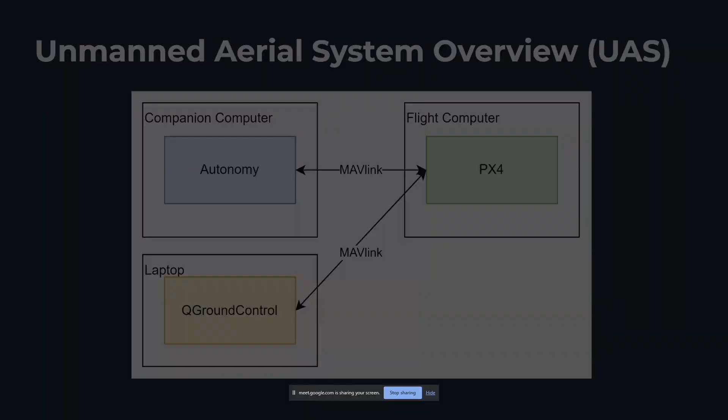This is what a typical drone that I've made at TAR in the past kind of looked like. So we had the Jetson TX2 as our companion computer, which talked directly to the Pixhawk 2. And then the Pixhawk 2 had some external sensors, which was like a 1D LiDAR for altitude estimation, or a GPS if we were flying outside.

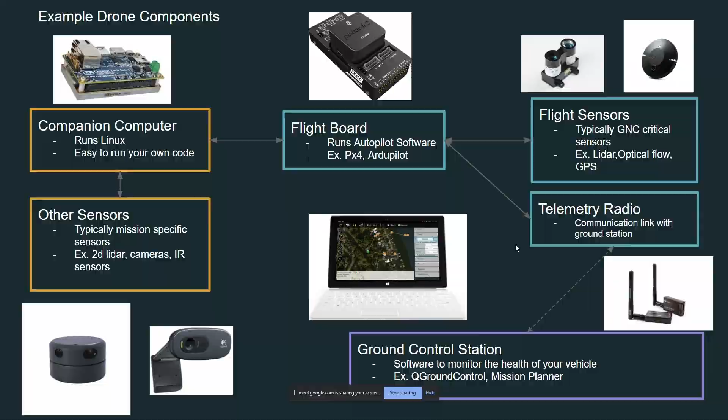So now I'm going to go a little bit more in depth into how the software on each of these computers is structured. So the Autopilot, as I alluded to before, runs the control loops. It also has a communication interface. It has a logging module, and then it also has drivers for all your sensors and actuators, as well as anything that directly comes with the flight control board.

And then another thing that's pretty special about the Autopilot is that it runs a real-time operating system, which basically ensures that all of the software tasks are scheduled frame by frame, and the operating system ensures that every task runs in a given amount of time and has the proper amount of allocation to run per frame.

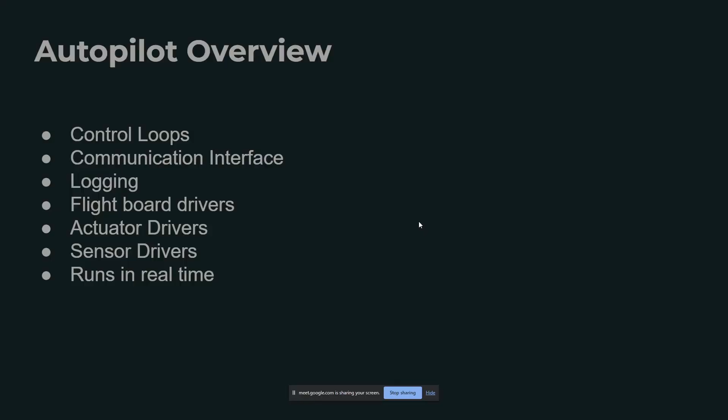consume the data. So for instance, your sensors will then go to what is called an extended Kalman filter, which basically takes all of the sensor data and tries to filter it and make a more accurate estimate of the state of the aircraft. And once the state of the aircraft is formulated, that data gets passed over to the control loops, and the control loops basically take the desired state of the aircraft and calculate what kind of inputs need to be given to the actuators to reach the desired state based off of the

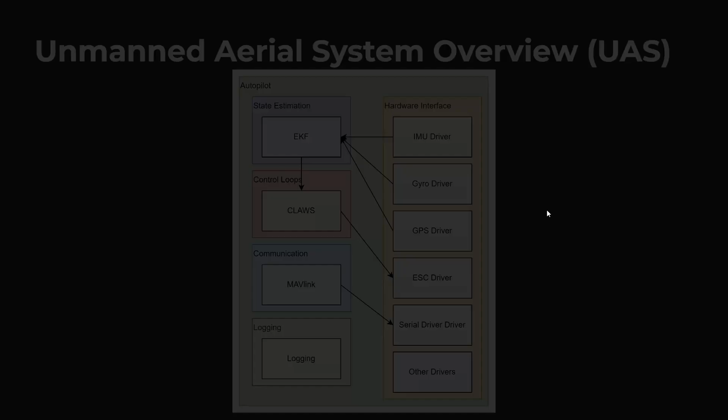So now a brief overview of MAVlink. I like to think of MAVlink as the glue that allows all the different computers in your system to communicate. It's a very efficient communication protocol because it's designed to be sent out on a radio where you probably won't have a lot of bandwidth, because you're taking a little radio with you out to the field, and the drone only has a little radio, and usually the ground control station only has a little radio, so there's only so much data that you can get between them, especially if you start going to long distances. So MAVlink has been designed to use as little data over the wire as possible.

Another thing worth noting is you could run almost the exact same Autopilot software in the loop. I wish I had made another block diagram of the Autopilot, because similar things to the Autonomy happen. Let me go back to the Autopilot block diagram. Similarly, there's a hardware interface in the Autopilot. In Gazebo, you'll have a simulated IMU, simulated gyro, and simulated GPS. So all of these modules are not compiled in the Gazebo SITL target.

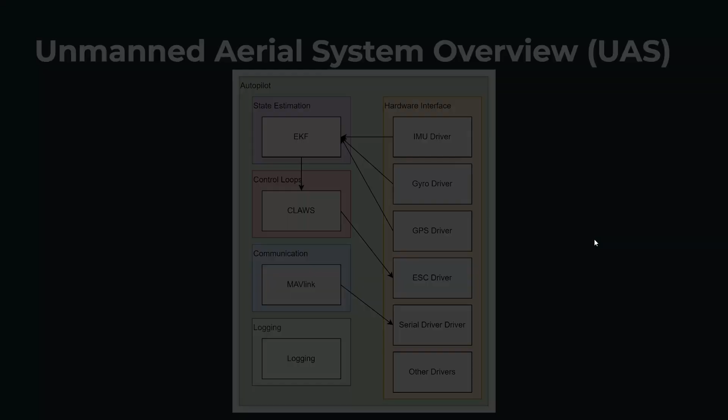And basically Gazebo is able to publish the data in place of these. There's a different module that takes the place of this, that translates the Gazebo data into the hardware abstraction layer, which then allows the rest of the system to function in the simulator. Yeah, that's a high level overview of how the simulator works.

Okay, I think I'm going to leave it here for now, and we'll go into the Intelligent Quad Simulator. So at the beginning, before we started the presentation, I had mentioned why I had built the Intelligent Quad Simulator, but essentially it comes from the time that I'd spent at TAR.

We spent so much time trying to dual boot people's PCs because a lot of the software that we use is Linux only, especially on the simulation side. And then once you dual booted your PC, you essentially had to install all these packages using Linux, which I was not familiar with in college, and most people that were in TAR were not familiar with. So it was quite the struggle.

Not only that, the different pieces of open source software are not the easiest things to install because they're kind of half supported. They're pieces of software that people publish out of their own goodwill. So they don't have tier 1 support, and it's not guaranteed to work on your system.

So the idea is I've essentially done the hard work of creating the simulation infrastructure. And because I'm using a cloud provider, the cloud compute is essentially infinitely scalable. Also, I'm able to create and destroy compute hardware as the demand for the simulator grows and declines. So that makes it very efficient for me to host the simulator.

And here's essentially how the IQ Sim might work in the reference autonomy architecture. What you'll notice is you won't be able to test your SLAM, or test vision in loop, because there are no simulated cameras or LiDARs for that to run. But you can potentially test different behaviors. You can test MAVROS and some of the other modules that you might have that don't require vision or LiDAR.

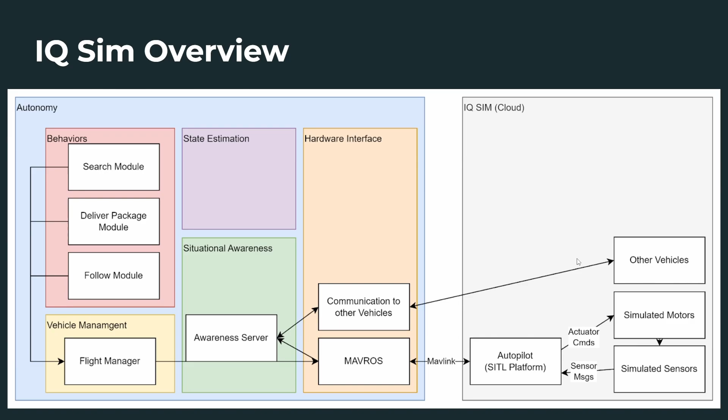And I think that is the end of my PowerPoint here. So at this point, I wanted to go ahead and try out the Intelligent Quad Simulator, and I was hoping that y'all would be able to follow along as I'm doing this. I had sent out an email giving some brief instructions on things to set up. If you've set those things up, you'll be able to follow along with this demonstration pretty easily.

I will give a bit of a disclaimer. I've never had this many people simultaneously using the simulator. So I really hope things work, and I think they will, but nothing's guaranteed when we're stressing the system like this. So with that disclaimer out of the way, we can go ahead and try it out.

So when you log into the Intelligent Quads website and you come to the simulation tab, you'll be greeted with this interface, which will allow you to configure your simulation. So you can switch between Ardupilot and PX4.

Antonio was telling me that you guys are probably going to be using PX4, so for the demo I'll go ahead and use PX4. Right now there's only the JMAVSim simulation type, and right now I'm only supporting quadcopter on PX4, but on ArduPilot you can do copter, rover, plane, and you can do plane or quad plane. There's a lot more options on the ArduPilot side, just because that's what I'm a little bit more familiar with.

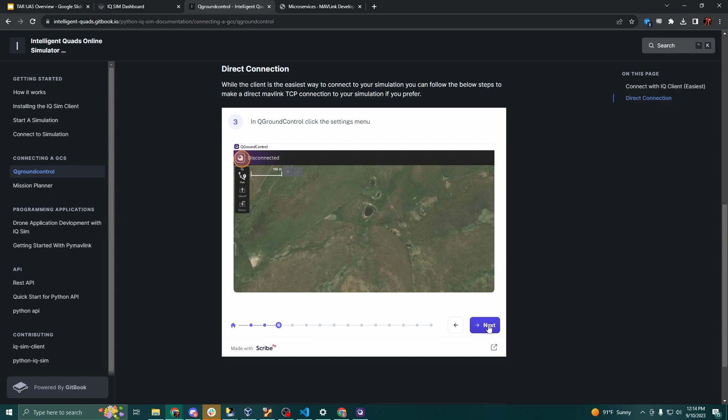Then you'll come to the application settings, go to comm links, hit add, and create a new link. You'll name it something, click TCP, paste in the IP address, paste in the port, and hit OK. Then you'll hit connect on that link we just set up, which should give you the same link that the client does. The client's nice because it does that, and then takes that TCP stream, makes it into UDP, and sends it on 14550.

The longer you use the open source software, you'll start to notice that this number 14550 is a special number. This is basically the default UDP port that a lot of the open source MAVLink software is expecting you to be sending out UDP on. So QGroundControl will auto connect to your drone when you have MAVLink sending on localhost, or actually just sending to the computer on port 14550. So I'll hit connect again, and we'll get the stream back.

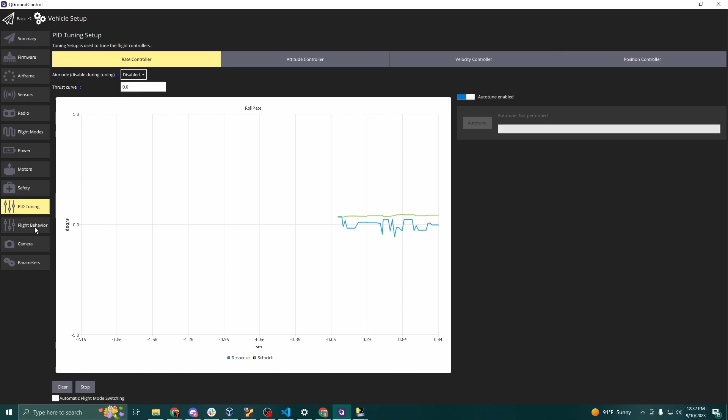Another one to consider is, I know in ArduPilot there is a ground control station loss, which is usually just warn by default. Setting that one to return mode is good, especially if you're not flying with an RC controller. Here's another tab that can help you with PID tuning. Another one that can help you with tuning. Some camera settings.

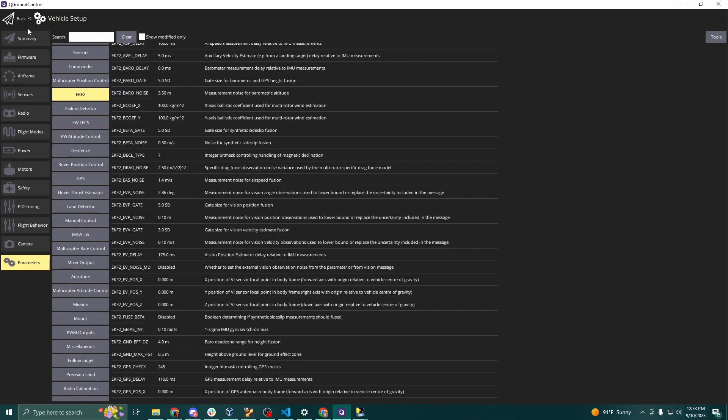And then here's the main parameter list. So there's a bunch of different tabs, and you can change literally all the features on the aircraft through these parameters. The EKF has a ton of different parameters, which you can read about and look up online. There's lots of documentation, and so this parameters tab is pretty important, and I've used it a lot.

Just to show off the interface to PX4, it's as easy as clicking takeoff and slide to confirm, and you can get the aircraft to start flying. Up here is showing your altitude, this other one is showing your upward velocity, and this one will show your horizontal velocity.

And you'll also see voltage and current if you set that up, and you can also add more tabs here and set up other things to monitor. So you could set up some information on GPS or whatnot and put that in your hotbar so you can keep tabs on it. Sending the drone to different places is really just as easy as clicking on the map and hitting slide to confirm, and the aircraft will go there.

There's a couple other actions that become available once you start flying. So there's the actions tab, you can click that, and then you can change the altitude. Slide to confirm. You'll see the altitude change.

The other one that is available is the return to launch feature. So you can slide to confirm, and then the aircraft will fly to a certain altitude and then fly back to the launch position, which is also another big consideration. There's a parameter in here. I think it's called RTL something.

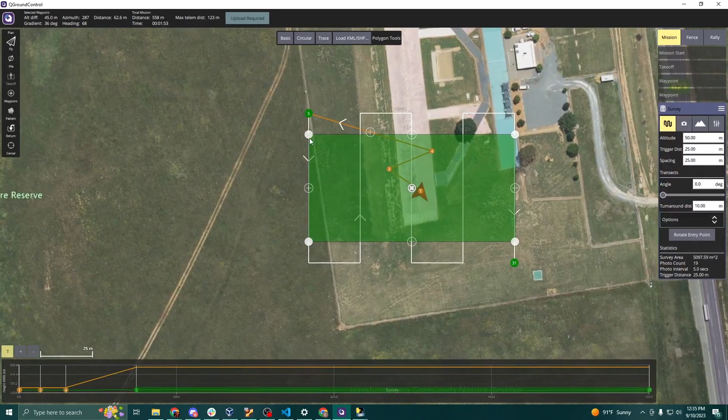And then similarly, the mission planning is pretty easy. You got to start with a takeoff, and you can adjust the altitude, put it at 5 meters, and you can plop in waypoints. You can even do more complicated stuff like scans. So if you were going to do a survey with your drone, you could plop that in and adjust the area that we're going to survey. And there's a bunch of parameters that you can play with, but I'll just upload that.

And then should be able to just slide to confirm, although it said not ready. Although I think it might go anyways. So, and then the aircraft will fly the mission that we just planned, which is pretty cool.

So I know that we've had some problems setting up the simulator, but getting to this point in the past has been a heck of a lot harder than what we just did. And assuming that the cloud simulator works, this could be a very valuable tool, especially for people who aren't necessarily directly involved with writing the software, because you can come in here and just figure out how the different features in the autopilot and ground control software work, so you can get a better sense of how the system operates. I hope that is evident now that you see it.

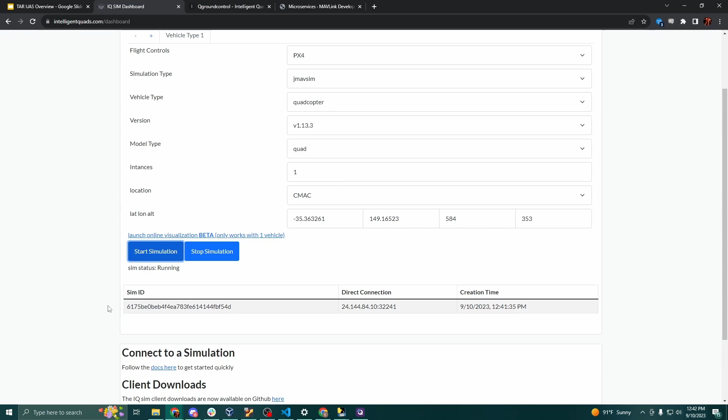My feeling is that Ardupilot is a little bit more stable. It feels like the user base is a little bit more hobbyists and people who use the drones for mapping and inspections, whereas PX4 seems to have a little bit more of a researchy base. So a lot of the features are things that people create in labs just to test stuff. And it just seems like some of the features, because of that, are a little less tested and a little bit more buggy. But granted, they usually have features a little quicker than Ardupilot, so there's the pros and the cons.

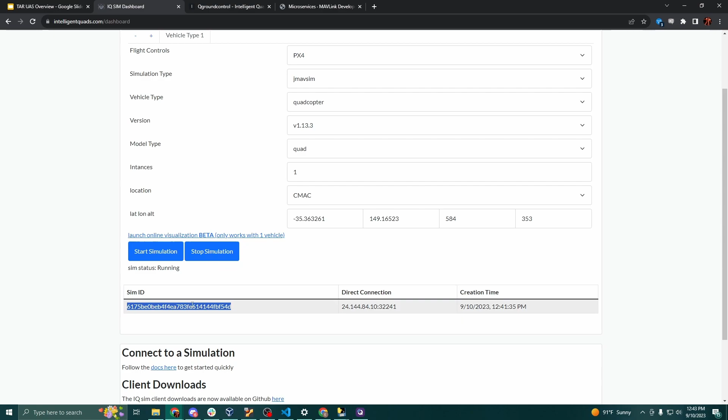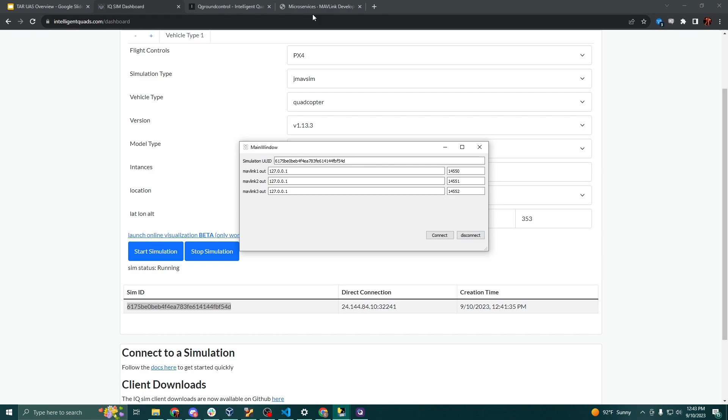All right, let's try one more time with this. Otherwise, might just give up and show a YouTube video. And then we'll end it. I think they can also try it out on their own time when there's less people on the cloud. Yep. All right, so I think I'm just going to show a 3-minute YouTube video, and then we can just do questions and answers.

Welcome to the Intelligent. So this video here basically shows how you can do application development. So it should be as easy as configuring your simulation, taking the sim ID, and then pasting it into the client. You can hit connect, and then QGroundControl will be connected.

The cool thing about the client is it allows you to split the MAVLink streams. So QGroundControl will communicate on port 14550, and I've written all the IQ MAVLink tutorial scripts to use 14551, so it's a non-conflicting port, and you can use that port for your applications essentially.

And so I have this little script that commands all the drones, tells them to go to an altitude, and then it uses a little algorithm to make a circle. So based off of the number of vehicles, it'll calculate where to put the waypoints to make a circle, which I only have 3 aircraft, so it just makes kind of like a triangle shape. But once I get this bug that we have discovered with the website fixed, y'all should be able to do the same.